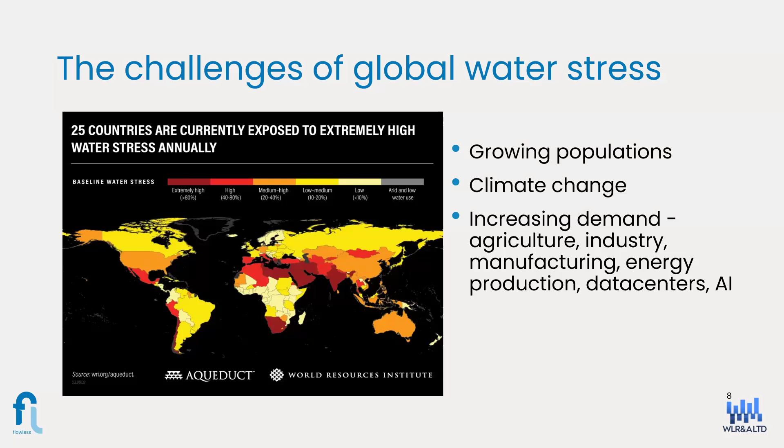It shows over 20 countries which are currently subject to extremely high water stress, where current demand is outstripping sustainable supplies. This is caused by numerous and significant factors, including growing populations, climate change, increasing demand from various sources, aging infrastructure, and a lack of access to capital investment. None of these factors are quick or easy to resolve in order to reduce that water stress.

Over the last few years, there's been a growing recognition that reducing non-revenue water can also reduce carbon emissions, and by linking the two together, significant capital investments can be unlocked at national and international level.

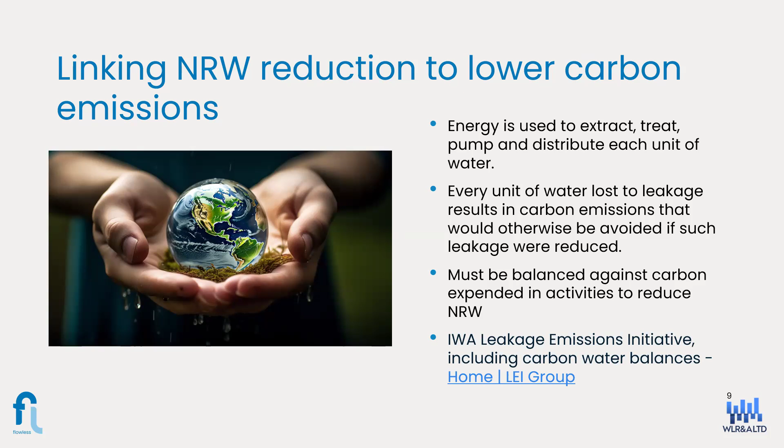Before we get going on setting strategy and exploring solutions to reduce non-revenue water, let's get back to basics and review some of the fundamentals. We're going to start by focusing on real losses, although we do have some information coming up on apparent losses, and there's great reference material in the reference section for you on apparent losses as well.

So it's time for poll number one.

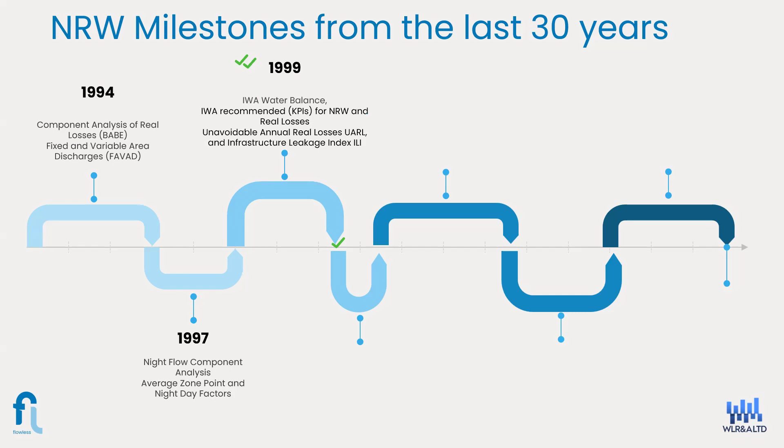Beginning in 1994 with component analysis and the fixed and variable area discharges concept from John May, through night flow component analysis, night-day factors, average zone points. In 1999, the IWA water balance, their recommended KPIs for non-revenue water and real losses, and the development of the UARL and the Infrastructure Leakage Index.

And if you look at that, that's just in the space of 6 years—couldn't fit much more in terms of all the other innovations since. So I've just picked out a few.

In 2000, 2001, the use of confidence limits in water balances, the pressure burst relationship in 2012, the EU reference document Good Practices on Leakage Management in 2015, the variable N1 concept, N1 pressure concept in 2017, and in 2020, UARL with SCF. So throughout this time span of 30 years, there have been many people across the world involved in these concepts and their application internationally.

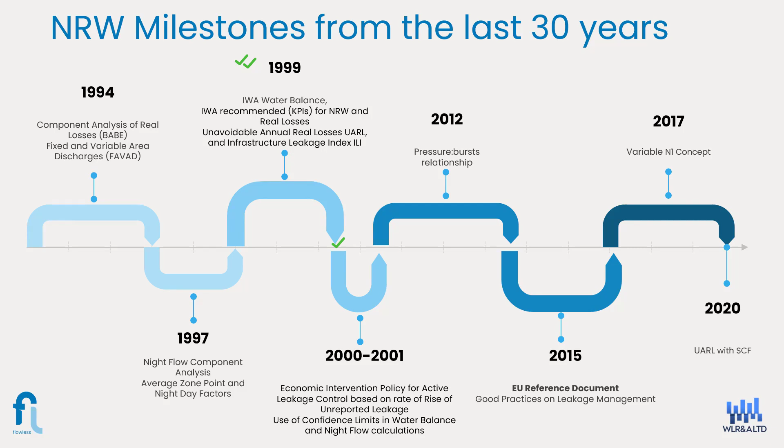For example, Bambos, who we have on the call today, Julian Thornton in Brazil, and Marco Fantozzi, to name a few. However, I think it's appropriate that we acknowledge Allan Lambert's incredible contribution to this industry. And so Aya, Bakker, and myself are really delighted that Allan is with us today to answer any questions you may have on all the illustrious points in his career in the Q&A session later on.

So let's dive into the water balance so we can see where non-revenue water fits into it. This is the enhanced IWA water balance, and the dotted area in red is what we consider to be non-revenue water, comprising of three main components.

Unbilled authorised consumption - these are items such as consumers who are not registered in a billing database, and use by water utility properties for operations and maintenance. We've got apparent or commercial losses, which covers illegal connections, meter inaccuracies, and data transmission inaccuracies.

And these two components, unbilled authorised consumption and apparent losses, can be a significant part of a water balance in low and middle income countries with poorer quality data. Also apparent losses can be higher in countries with customer roof tanks or customer ground level tanks due to meter under registration. The link at the bottom of this screen is to the apparent losses guidelines and appendices, which were put together by about 9 or 10 international practitioners 10 years ago. They're really invaluable guidance on understanding the components of apparent losses and how to estimate them.

And then we get onto the real losses or physical losses, which is the leakage on transmission and distribution mains, on service connections up to the point of metering, and leakage and overflows on utility storage tanks. Reducing each of these components of non-revenue water requires a different approach and a set of different targeted interventions.

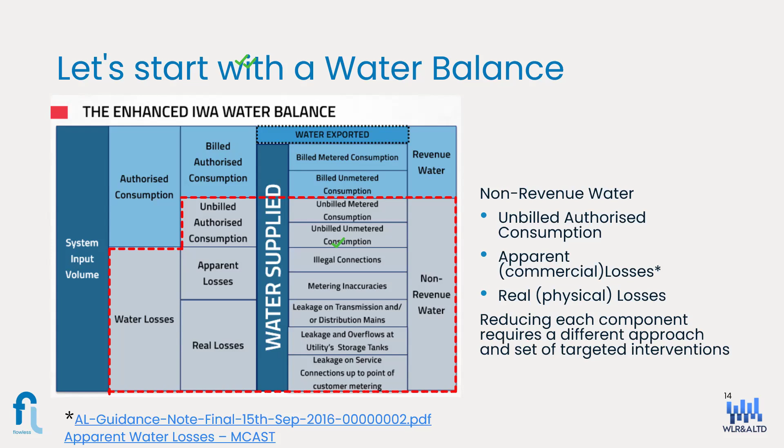As you have already seen in that timeline graphic, the relationship between pressure and leak flow rate was established back in 1994 by John May, and the pressure burst relationship developed and applied from 2012. So the benefits of managing excess pressure have been known and internationally accepted for more than a decade, and for even longer if we're talking about John May's work.

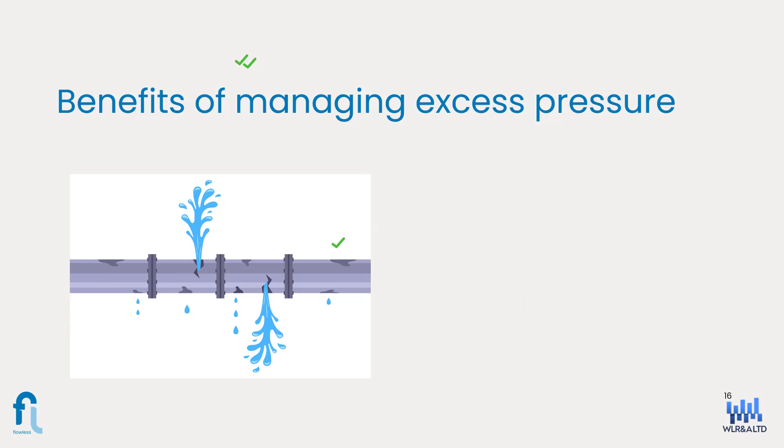So the main benefits of managing excess pressure: to reduce and manage transients, to reduce the leak flow rate of your leaks, to reduce burst frequencies. And this can often be a significant benefit of managing excess pressure. The byproduct of that is that by reducing the burst frequencies, you're also going to extend infrastructure life. And it may also result in a reduction of consumption.

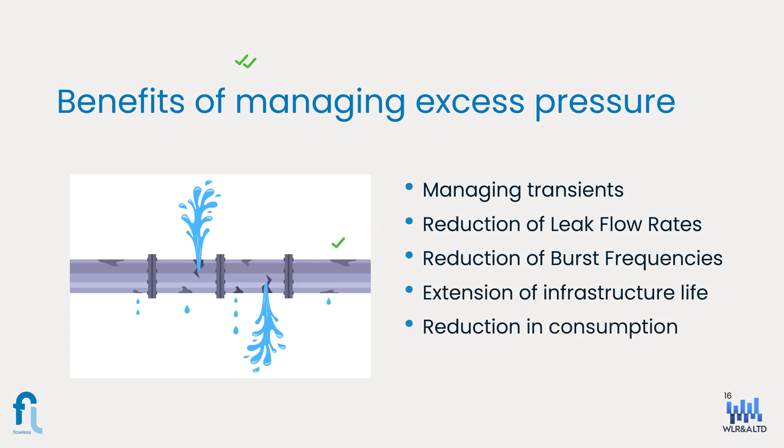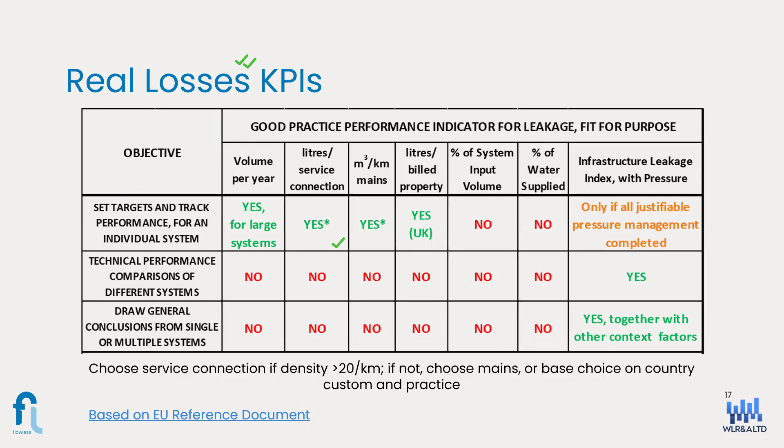The closing part of my section before I hand over to Bakker is really looking at system correction factors, because these have now been implemented in around 13 countries around the world. The purpose of the system correction factor is to address the restrictions of the 1999 UARL equation.

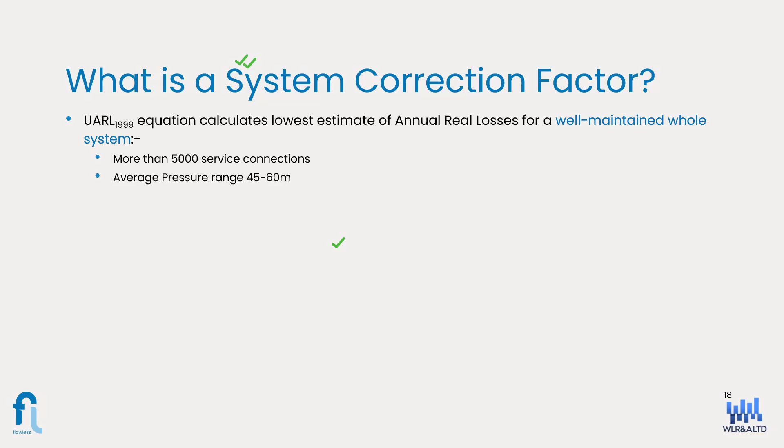The 1999 equation calculates the lowest estimate of annual real losses for a well-maintained whole system with more than 5,000 service connections, with average pressures ranging from 45 to 60 meters. Outside these boundary conditions, for smaller, lower pressure systems, the UARL 1999 equation will overestimate volumes, and it will underestimate them for higher, larger pressure systems. So the system correction factor is a calculation using software which overcomes these boundary conditions.

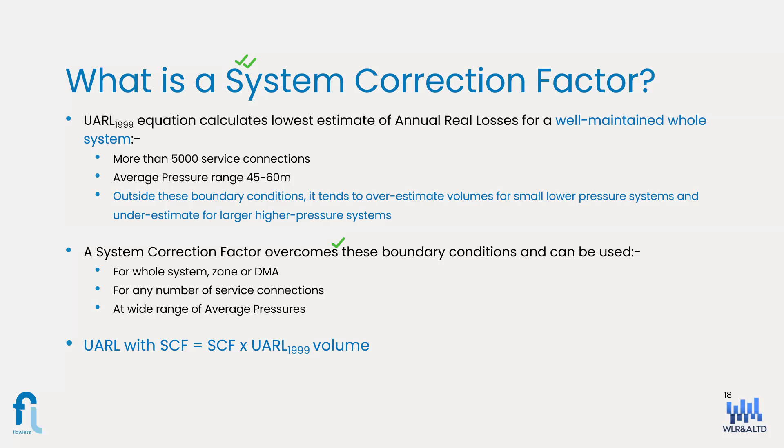It can be used for a whole system, a zone or a DMA, for any number of service connections, and at wide ranges of average pressures. When you calculate the value of a system correction factor, you get a number, usually less than 1 for smaller, lower pressure systems and more than 1 for larger, higher pressure systems. You multiply that number by the volume from the 1999 UARL equation to get your corrected volume.

The system correction factor is really useful. Its main purpose is to identify maximum recoverable leakage for a DMA or zone. It will help you really quickly identify where there may be more bursts to be detected, so where you could send out active leakage control teams, and if you were able to reduce any excess pressure, where that will be most beneficial.

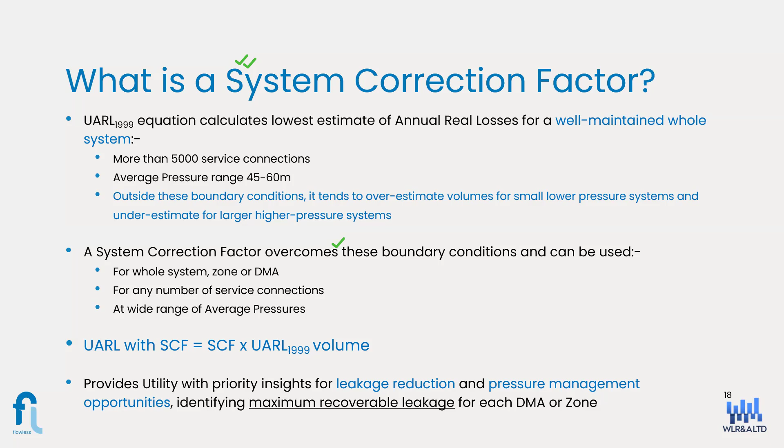The SCF calculation leverages 3 influences which were either not known or not quantifiable in the original 1999 equation. The first is the fixed and variable area discharges concept from John May's work in 1994. This is the relationship between how the leak flow area responds to changes in pressure, and how that differs in different pipe materials, whether rigid or flexible. The N1 power law simplifies this pressure leak flow relationship.

The original UARL equation from 1999 uses an N1 of 1 for simplicity, so a 10% reduction in pressure results in a 10% reduction in leak flow rate. But SCF calculations use different values of N1 for rigid pipes compared to flexible pipes, and to calculate background leakage.

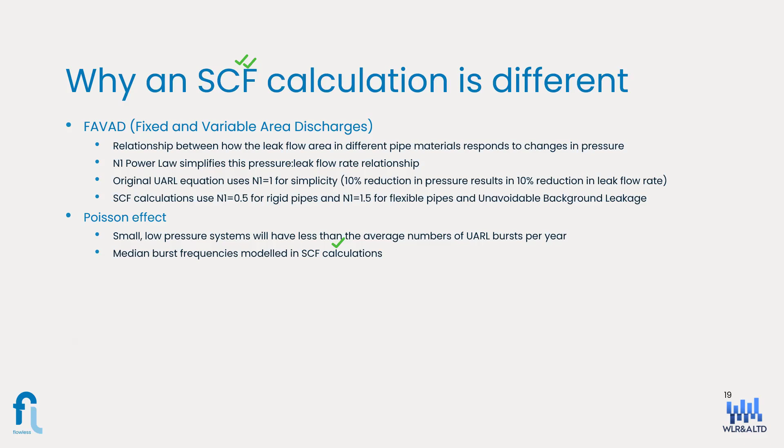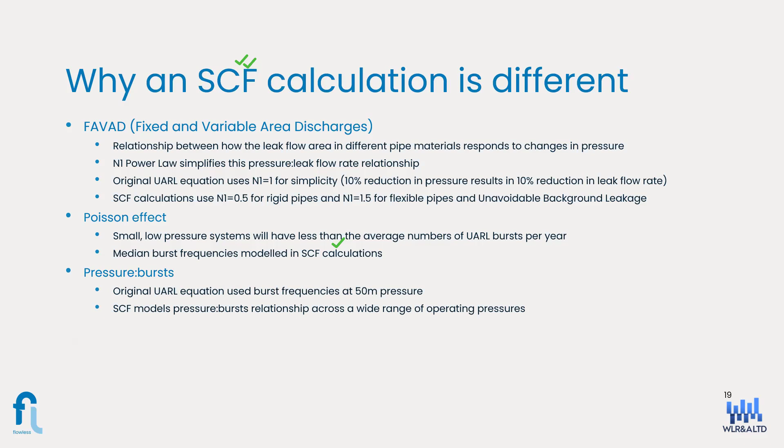It's logical that in smaller, lower pressure systems, there will be fewer than the average number of UARL bursts per year. So SCF software doesn't use average burst frequencies, UARL burst frequencies, but median burst frequencies. Then we have the pressure burst relationship, which in the original 99 equation used burst frequencies at 50 meters pressure, but now we can model the pressure burst relationship from 2012 into the SCF calculation.

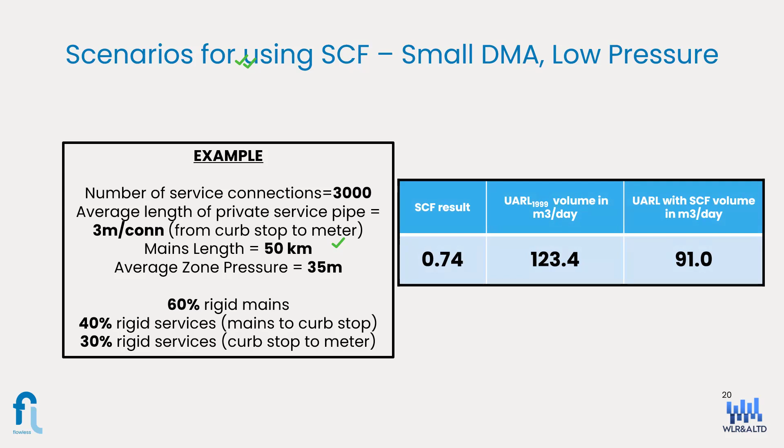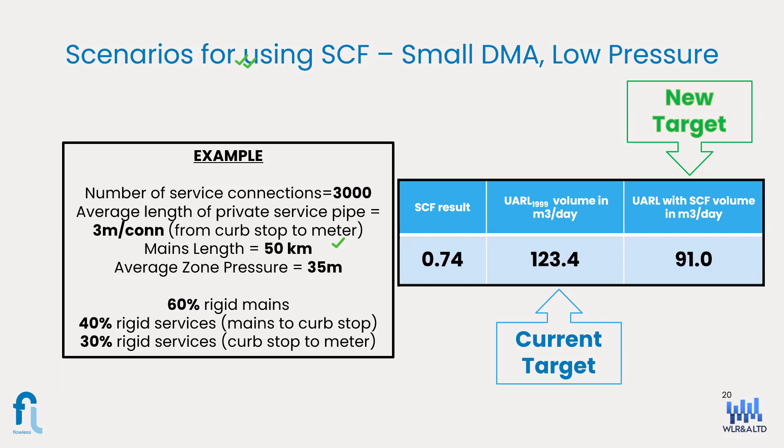What we get here is an SCF result in that first blue box of 0.74, which we multiply by the 1999 UARL volume. When target setting in this zone, we may have set a target close to the UARL volume, 123 cubic meters per day. But what SCF is telling us is that there are more opportunities to look for bursts in that zone or DMA, and if it's economic to do so, we could get down closer to 91 cubic meters per day.

In that zone we can also look at what will happen if we try to reduce pressure further. We're looking at 91 cubic meters, the green box on the right-hand side, as our target at 35 meters pressure. If we drop the pressure to 30 meters, we could set a target of just under 73 cubes. At such a low pressure it may not be possible to drop by 5 meters, but even if we reduced by 1 meter down to 34 meters, the UARL target volume could be reduced further by 3.6 cubic meters per day, or just over 1,300 cubic meters per year.

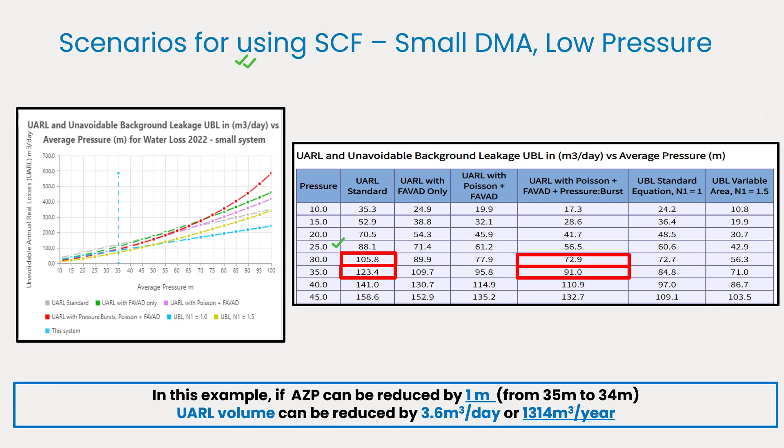If we now go to a zone which is double the size, double the mains length, double the pressure, let's see what that does with an SCF calculation. We end up with an SCF of 1.17.

So if our 1999 UARL calculation gave us a target of 493.5 cubic meters per day, the SCF is telling us we're unlikely to be able to meet that volume target at this pressure, and what we should be doing is setting our target higher at 578 cubic meters per day.

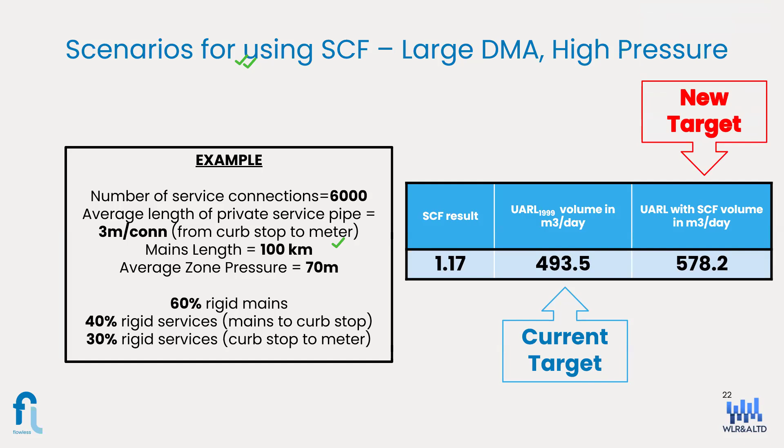If we look at the pressure calculation, SCF, this is the right-hand box, is suggesting a target of 578 cubic meters per day. If we could drop the pressure to 65, we could set our target lower at just under 504. But if we can only drop the pressure by 1 meter, the UARL volume target would be reduced further by 15 cubic meters per day, or over 5,475 cubic meters per year.

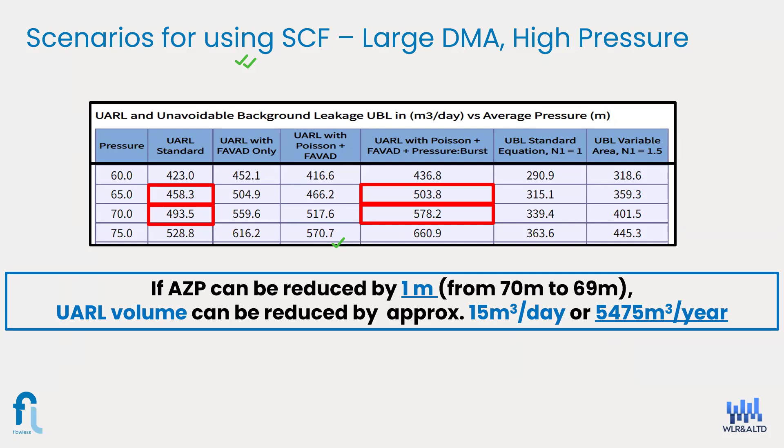So when utilities are considering using SCF, we would recommend they still use the 1999 equation to calculate a whole system UARL, unless their whole system is less than 5,000 connections or operating at lower than 45 meter pressure or higher than 60 meters pressure.

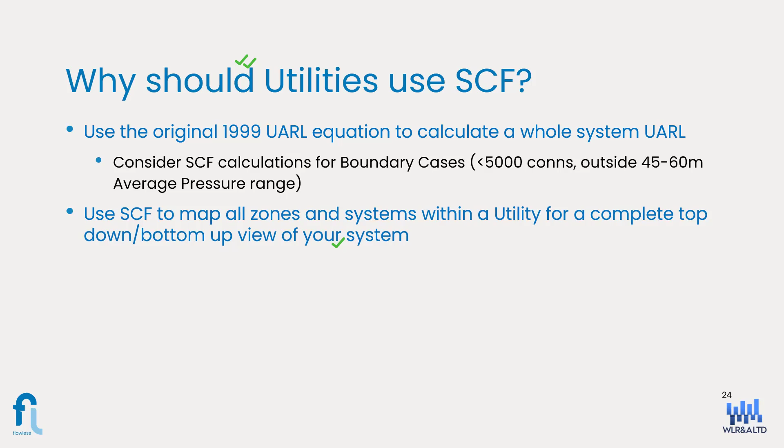What a lot of our customers have actually done is used SCF to calculate values of SCF across all the zones and DMAs within their system. And then that will allow the utility to see where volume targets can be reduced and where active leakage control can be targeted.

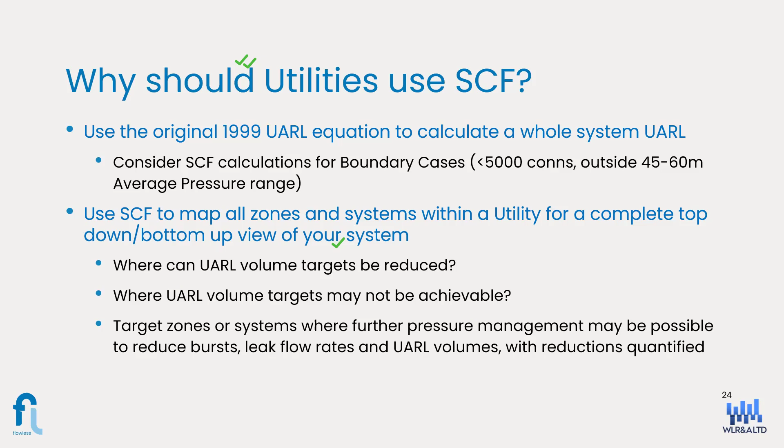And in those larger, higher pressure parts of the network where UARL volume targets may not be achievable, it allows utilities to target zones or systems where further pressure management could be possible, and that will reduce bursts, leak flow rates, and UARL volumes, and the software will quantify those.

As I mentioned, we've had more than 3,000 calculations now in over 13 countries. These are just a section of some of the references that we've had.

First from Will Jernigan of Cavanaugh in the USA, suggesting how useful this was going to be for the many small systems in North America to use in conjunction with the free water audit software from the AWWA.

Water Services Corporation in Malta, who were our first customer, have acknowledged that fine-tuning the UARL now in Malta is saving them millions of euros in the process.

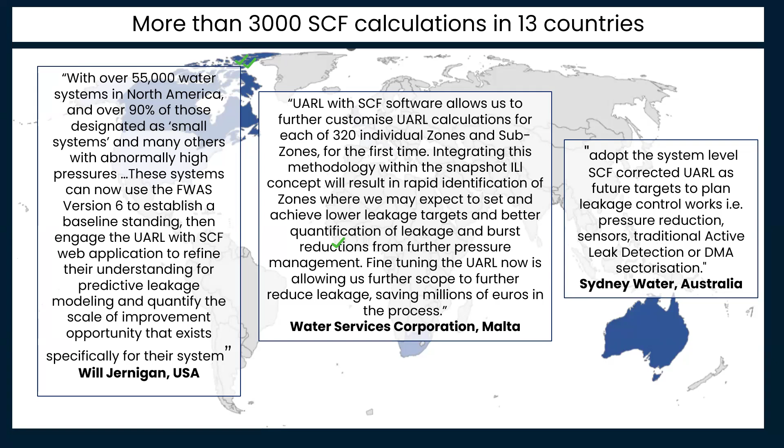And in Sydney Water, where they're using the system-level system correction factors to help target and plan future leakage control works, such as sectorization, pressure reduction, and active leak detection.

So that's a little bit about the past, where we've come from, and where's the journey going to take us now. I think it's really important that we stand on these strong foundations built by the pioneers and giants of the water loss reduction industry over the last 30 years.

Wherever you are on that non-revenue water reduction journey, you may be right at the beginning. You may only have static data, or you may have near or real-time data. You could be much further advanced in your level of maturity of your reduction journey. But there are proven conceptual, data-driven and AI solutions which are going to help you move forward and reach your goals.

And so the main message I have to close is, whatever solution you choose, make sure you understand some of these fundamentals first. In particular, the really fundamental change that reducing excess pressure can make within your water distribution network.

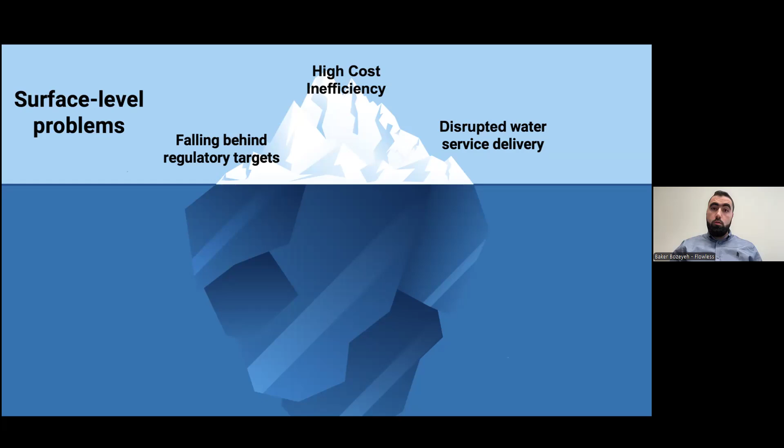If we really dig deeper under the surface, we would see the root causes of those problems. Here we're talking about emerging leaks, limited capacity, manual data handling, and of course budget limitation, which is kind of a problem for everyone.

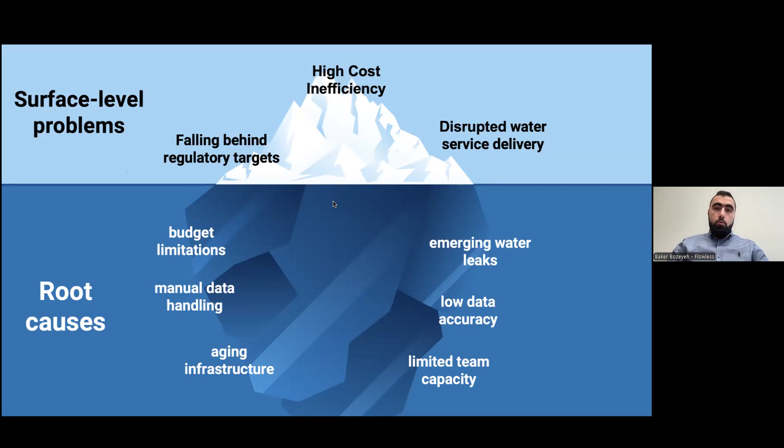Now, for us to start tackling non-revenue water effectively, we need to tackle these root causes. Think of them as barriers in your way to building efficient operations and providing better water supply for your consumers, for the communities that you serve. So we'll see how we can tackle them one by one, addressing limited capacity in terms of technical capacity, limited resources, or limited time.

We'll see how we can address those with the use of tools that help us automate our operations and calculations. And then, of course, how we can be more effective and efficient with our time and money, and address really intimidating issues like aging infrastructure, and how we can prioritize our rehabilitation program instead of replacing assets here and there.

Now, the way we like to think about non-revenue water management is through a comprehensive approach that we call losses lifecycle management. It's really a lifecycle because it starts from the first step towards the end, and then it goes around again. You'll see this in a moment.

First of all, the first step towards effective non-revenue water management is being aware of those problems, like leaks or other issues. Speaking of leaks, we see that many utilities jump right to trying to fix leaks, whereas it might be something else—it might be metering inaccuracies or illegal use, etc.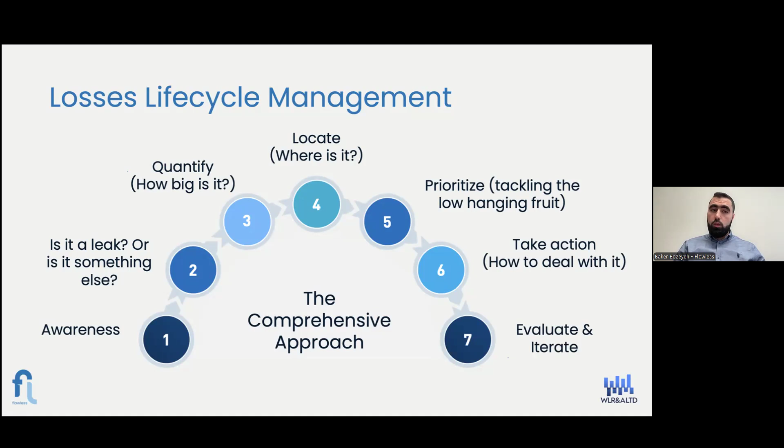Now, for us to be able to manage this whole lifecycle, let's see how technology can support us along the way. Here we need a disclaimer, because people think technology is a magical wand. It really isn't, right? Technology is a tool that you can use to help fix the problem, to detect the root causes.

But then you need to do something else. You need to go to the field to try to fix the problem and address it. Again, going back to the root causes, because those are the important things we need to address properly. Here we are seeing a paradigm shift from a data-driven approach to an insight-driven approach. We're specifically talking about the fact that data is not enough.

So this poll is asking how confident you are about the quality of your data. Do you think it's good quality, good frequency, and accurate and precise enough? Or do you think you need to improve a little more on how, where, and when you collect this data? We're talking about flow volumes for bulk meters, consumer consumption data, pressure data, among other types of data. Think about it as a big package, and we're asking this question to understand where you are and see how we can help.

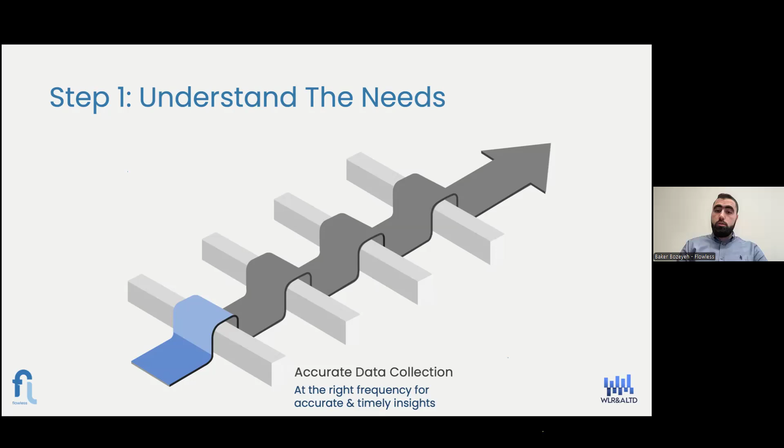And here we do that by going through what we call the smooth tech adoption journey. The journey starts from understanding your needs based on data collected from the field through the right frequency and accuracy for timely insights. Then from there, if we need to see how this is applied in the field, we go there and support you on understanding your network and planning for the intervention.

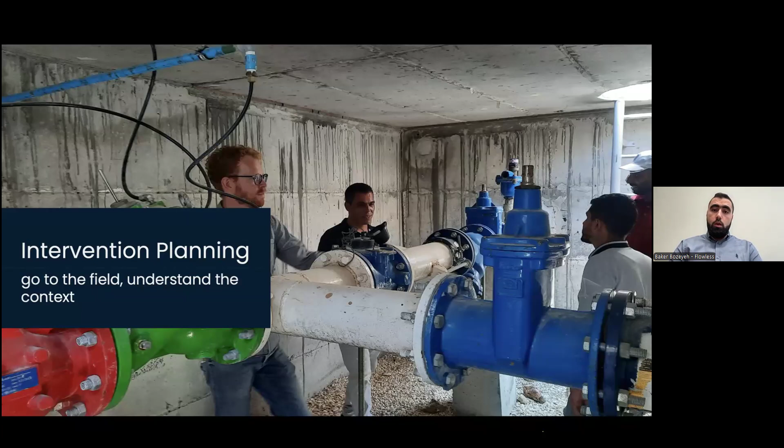So for example, sizing for the meters - you really need to take care of that, because if your meter is not capturing your minimum night flow, for example, that's not good for the accuracy and precision of your data. That's just one example. This is why you need to place your sensors and meters strategically based on some analysis and assessment of the network. And it happens at this point in time, at this step.

Then deploying some data loggers or using your existing data, like from SCADA systems, and then moving on to the next step, which is analyzing this data, setting your targets and defining priorities, because at the end of the day you have limited resources, limited time, and limited capacity. So you need to start with the low-hanging fruit, tackling them first, and then move on to other interventions.

Step three is continuously watching your data and the insights that come from the analysis, keeping your eye on the network and on those analyses, and trying to predict issues even before they emerge.

Then utilizing those insights to allocate resources to the exact source of the problem. Again, it might not be a leak, it might be something else, like metering inaccuracies, or even errors in handling and collecting the data. And evaluating and improving along the way to continuously optimize the process and maintain the reduction you achieved in non-revenue water. Otherwise, it would go up again, as you probably know.

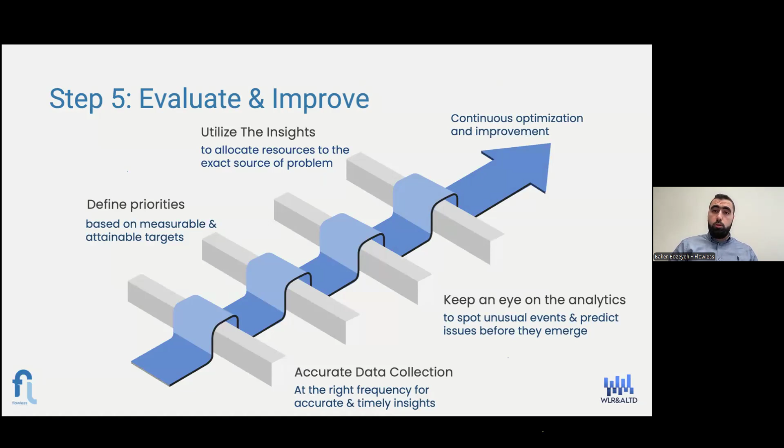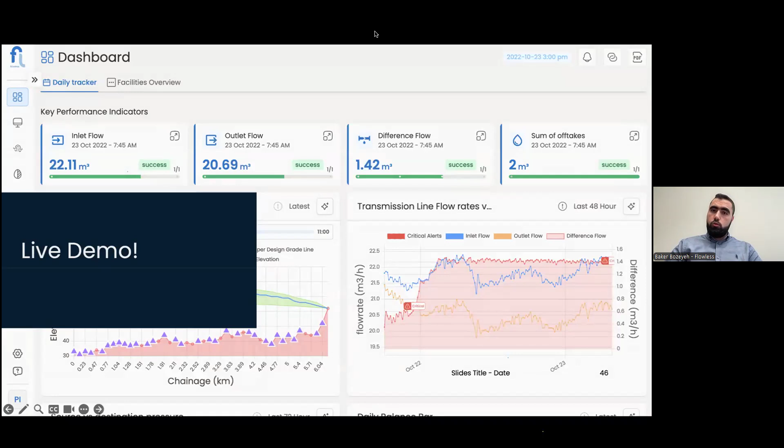Now we're going to move on to the practical stuff, how we can apply this whole thing. And that's through our software, WaterCloud, implementing and involving a system correction factor from WLR&A, from Kate and Allan's work. We'll see how to do it, and for that I'm going to do a live demo and show you how the system works. While I do that, please feel free to share any questions in the Q&A box, and we'll be happy to address them afterwards at the end of the meeting.

So this is the dashboard. This is Flowless WaterCloud. By the way, this is deployed for a project in Malaysia in partnership with Wyeth Water. You probably know Gary Wyeth and his team. We've worked with them on deploying these analyses, integrating SCF to make them even more accurate, more precise, more fit for the context. We'll see in a moment how we can get those results.

So the first step in our loss management journey starts from here. This is the main dashboard, and in the main dashboard you can see KPIs like total daily demand for yesterday, total daily leaks, the maximum recoverable leak, and some graphs to visualize those KPIs.

You'll see the data is frozen at 30th of August, because this is what we call a snapshot analysis. A snapshot analysis, as the name suggests, is a one-time analysis for your data. Here we get your data through CSV files or Excel sheets or whatever, we plug them into the platform and magic happens. All the analyses are done automatically, like a water audit, your annual or semi-annual report for the water audit, but it's not on paper.

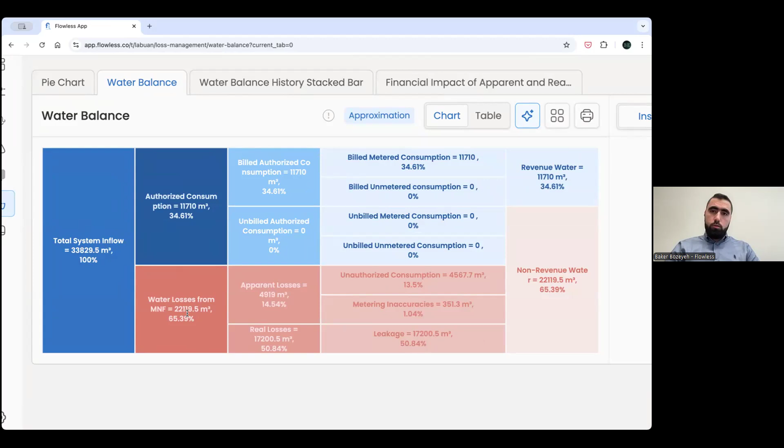For those not familiar with the water balance, a quick clarification: we're looking at how much is getting into the DMA, which is the system input volume. This is broken down into authorized consumption and water losses, as Kate previously mentioned. Through this tool, you would be able to see that leakage is probably the major part of the problem, which takes us to the next step in our loss management journey, which is the leak inspector.

This is a tool for the utility or the operator to look at the whole network, but through the lens of leaks or real losses. Of course, real losses also include overflows, but here we're really focusing more on leaks in this tool. You can choose whatever DMA or zone you have, click on it, and see the data.

This is a very interesting chart because it shows different lines. The green one is the flow or demand of the DMA. The red one is the leakage, calculated through the minimum night flow analysis, and it's distributed along the whole day using FAVAD, fixed and variable area discharge.

We can get a better picture by clicking on more details. All the constants and assumptions for each DMA are included here: household usage, length of mains, N1 which you can specify for each DMA, number of house connections, and the SCF for the day, which is the system correction factor for modifying the UARL. You can play with the numbers from here, but I wouldn't dare do that now because it would mess things up.

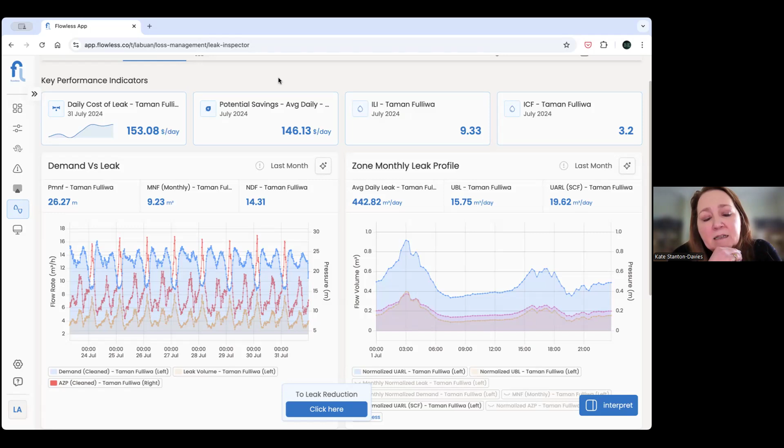In this situation, that's down to the fact that we're a very small system operating at a very low pressure. In these circumstances, what we see with some customers around the world we've worked with is that there's a certain combination of small system, level of connections, average operating pressure, and particularly zones with flexible pipe materials. You get to a spot where, as this graph shows, the corrected UARL volume is just slightly above the background leakage.

So we can definitely consider going into that zone and looking for bursts. We would certainly expect that we could set that target more towards the SCF-corrected volume than the original volume calculated using the 1999 equation.

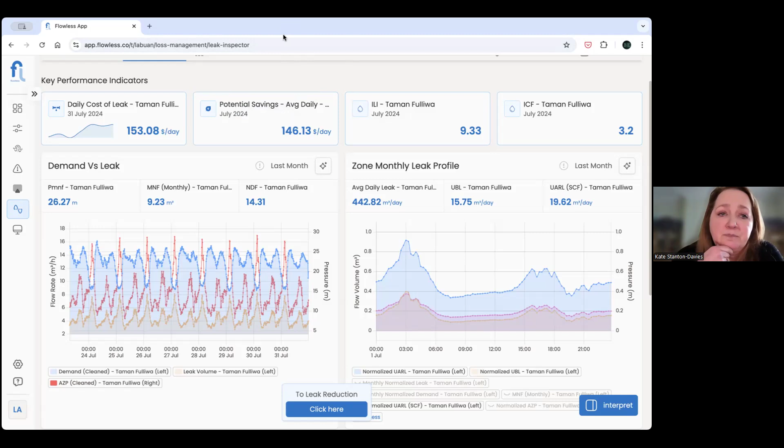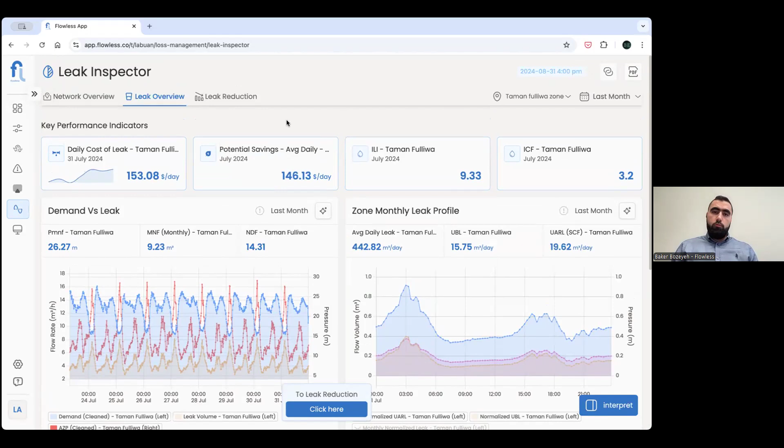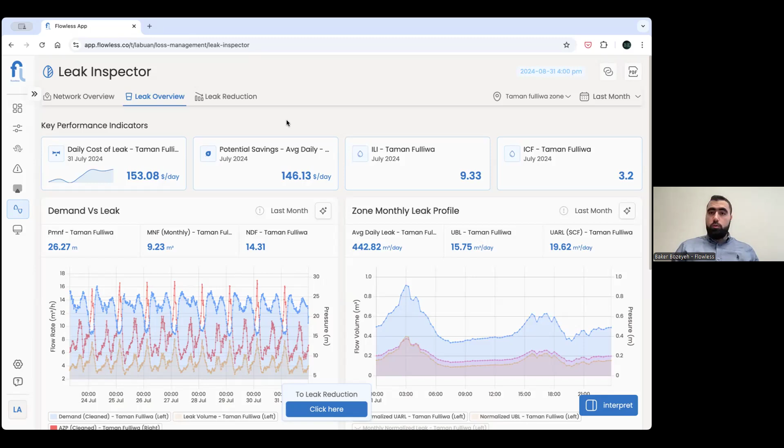That's very helpful. One thing I forgot to mention is the validation of data, as we mentioned earlier. This can be easily done here because all of the assumptions can be modified. For example, if you noticed in the water balance, the illegal use was pretty high for some DMAs. That might be correct, but it might be a problem with the data. Also, billing data was very low, which raises some doubts. This gives more insight for the utility to start screening their data to get more accurate and precise insights. For example, if you need to play with those constants, you can easily do that through the right side pane in the leak inspector we saw previously, and you'd be able to see the results of those changes on the analyses as soon as you make the modifications, which is what we've done with Kate, Gary Wyeth, Sufyan Tzedek and their team.

Now the last step in our loss management journey is really trying to figure out what the utility can do to reduce those losses or leaks in this case. For that, you can click on this button to go to the last step.

In this tab, you'd be able to see a comparison between the current status of the network and the potential savings you can probably get through different interventions. We'll see in a moment how we can also predict the impact of those different interventions.

But before doing that, let's look at this very interesting chart. This is a quantification of the maximum recoverable leak, which is basically if we subtract the UARL, in this case corrected with the system correction factor, from the total leaks in the network, we get this figure. And of course, the potential monetary savings give more incentive for different management levels in the organization to take action.

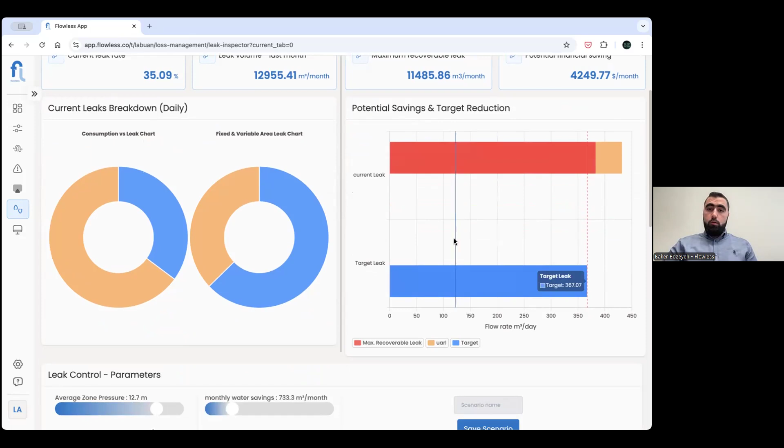One very interesting intervention we can do here is pressure management. For example, if we go to this DMA, this chart tells us how in this bar we have the total leak, broken down into maximum recoverable leak and UARL. This is the target we've set for ourselves as a utility for leak reduction. We can see this can be a reasonable target because it falls within the maximum recoverable leak. If it's higher than that figure, it would not be achievable because it goes into the unavoidable annual real losses.

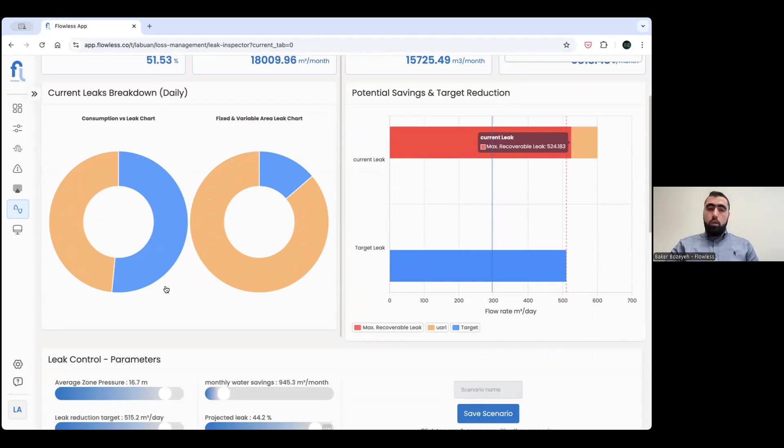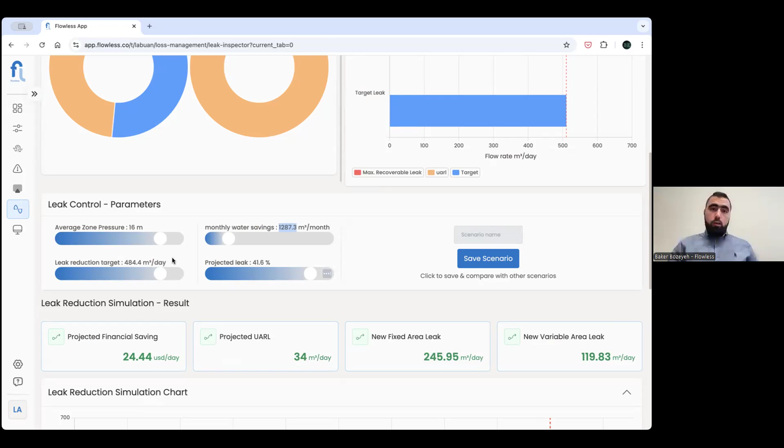Now, the last step is for us to understand or predict what we can do to reduce those leaks. Pressure management, even a small pressure reduction, can yield some really good savings relatively easily. For example, here we have pressure at almost 17 meters. If we drop that to 16 or maybe 15, you'd see we'd save this amount of water for this very small system, which is significant considering the small drop and that the pressure is already low. If you have higher pressure, say 50, 60 or even 90, you'd probably realize lots of savings, and it all depends on your figures for N1. Probably Kate can talk more about that if we have time.

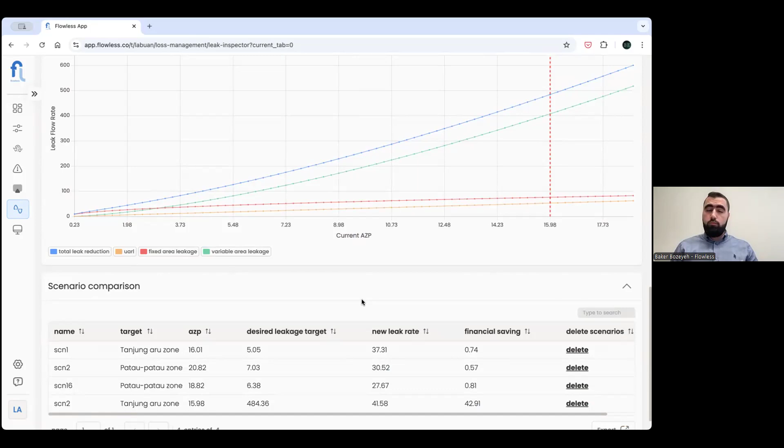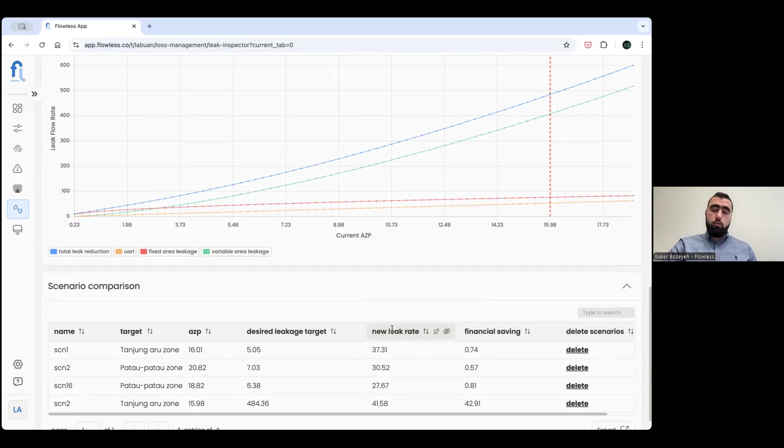The last step is saving this scenario and doing a comparison between different scenarios. As you can see here, we have different zones with different scenarios created using this tool, or other interventions like active control or replacing consumer meters and their effect on loss reduction. We can compare all of that, and if you have more DMAs, like hundreds, we can visualize that on a map, a heat map, to give insights on where to start and how to tackle this problem. This is the end of our loss management journey.

But we often see that utilities sometimes need even more support to understand the analysis and interpretation of the data, and to get faster interpretation and faster analysis. This is really because the level of expertise is not the same across the whole organization.

You have experts, you have maybe junior staff, and you have the people at the management level, so the financial manager and so on. We believe that all of those should be able to understand everything here, regardless of their expertise and regardless of their experience.

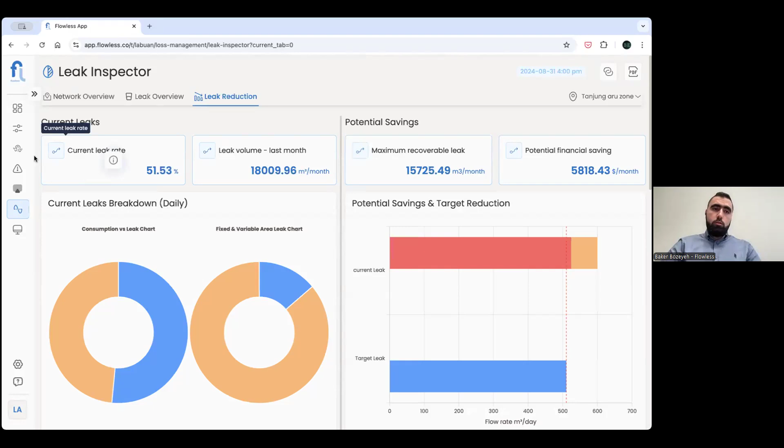To facilitate this and make those insights accessible for everyone, we've developed a tool called Flowless Octopo. Think of it as your water network expert. It's an AI agent that safely and securely looks at your analysis, and you can ask it basically anything.

For example, you can ask it to find leaks in the Patau-patau zone, which is really the name of a zone in this project in Malaysia. Octopo would bring in the most relevant piece of insight, which is basically this chart. I can look at it, try to interpret it, and of course play with it.

It's bringing it really from other pages in the system, but bringing it to our fingertips, instead of you trying to figure out where you saw that graph or trying to navigate for it.

The most interesting part is it really explains it to us in plain English, plain French, or plain Arabic, whatever you want, describing what this chart says, what's the value of it, interpreting the data, and finally providing insights for what you can do to fix the problem and tackle it, like insights into recent alerts or how to reduce losses.

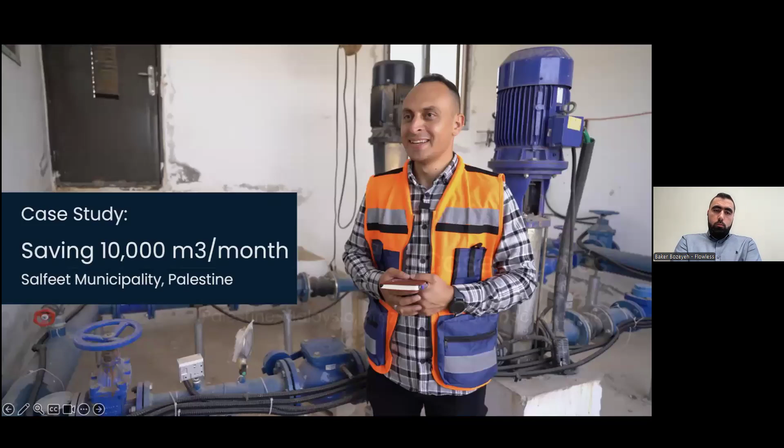One of the case studies is for a very small utility, talking about 10,000 house connections. The utility is called Salfeet in Palestine, and they've been using the Flowless system for a while. They were able to detect leaks through minimum night flow analysis and step testing - we can use artificial intelligence to detect leaks or very simple interventions like step testing. Through this, Salfeet was able to save more than 10,000 cubic meters of water on a monthly basis.

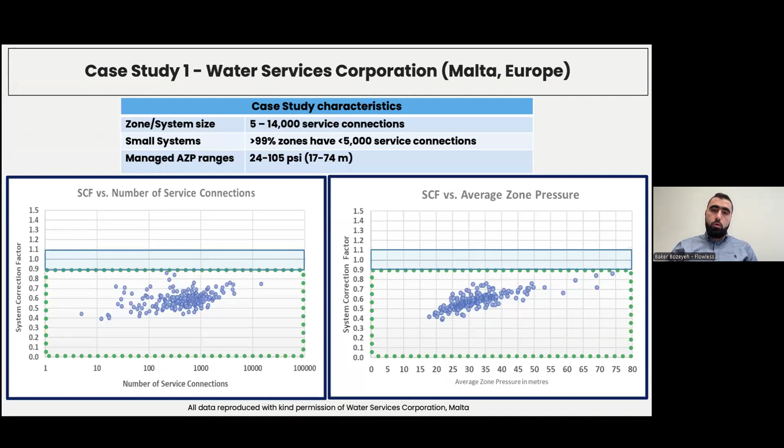Those are some case studies from Alan and Kate's work. You can go through them at your own time afterwards when we share the recording and the slides.

Now finally, if this sounds interesting and if this is something that can bring value to your organization, your community, and your clients, then we would love to help you get started. For you to really get started in leveraging smart technology in your network, first of all, this is like a wrap up for everything that we talked about.

The technology transformation journey: understanding the context, then defining your targets, setting your priorities, deploying the technology based on that understanding of the context so the technology is fit for purpose, and then utilizing the insights, implementing those interventions based on the insights, and improving and iterating along the way. Those are some really interesting references that you can also refer to for some of the analyses.

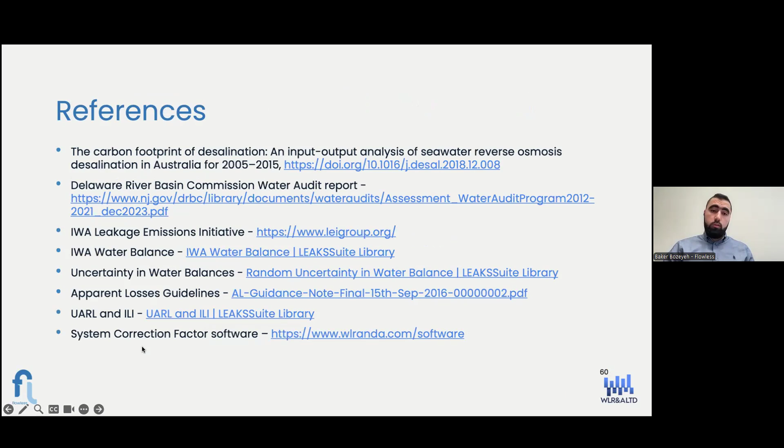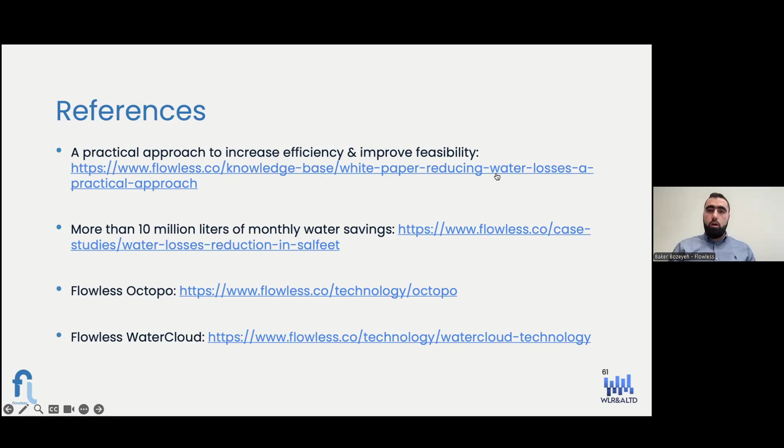One of the very interesting resources is the LEAKSSuite. You can look at it, and it has lots of explanations about those concepts if you need to dig deeper into them, and some more details to help you understand how you can apply that technology for your water system. If you're just starting with non-revenue water, go to our knowledge base and read our white paper on reducing water losses and non-revenue water management.